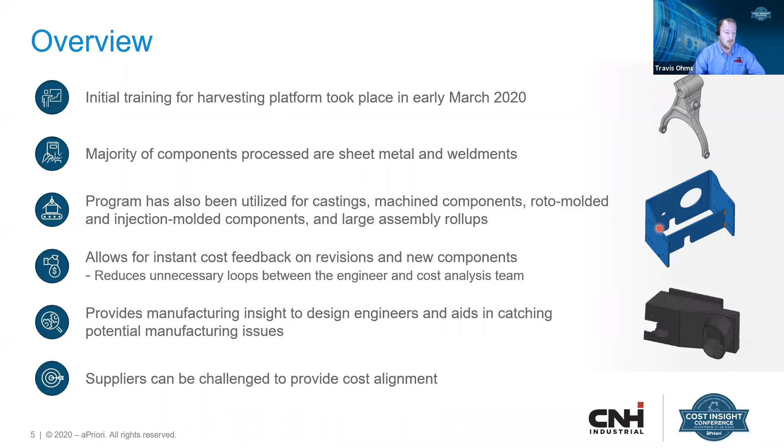So moving on, we'll go ahead and step into our Roto-Molded process evaluation study, which we just recently completed. This was done as part of a current product improvement project. It was initiated through our mid-range combine current product improvement team in Sorocaba, Brazil. It's comparable to a current production roto-molded component for our flagship combine team.

As you can see on the right-hand side, we have a highly featured baseline component to use as a reference. The goal was to ensure that the cost of our new design for the mid-range combine platform was comparable to that of the flagship platform.

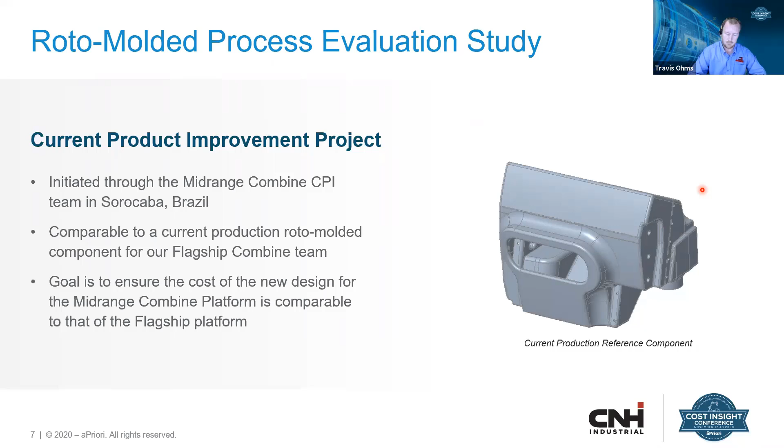So we'll go ahead and take a look at our baseline evaluation. The production component was evaluated in aPriori to understand the cost differentiation between the software and the real world. Having that baseline is an excellent resource to ensure we are remaining grounded and have not made any bad assumptions along the way. So as you can see here, we were able to generate an estimated cost using aPriori of $26.63 versus the actual cost of $25.26. So from there, we had a reasonable margin of error, and we're able to move on with confidence.

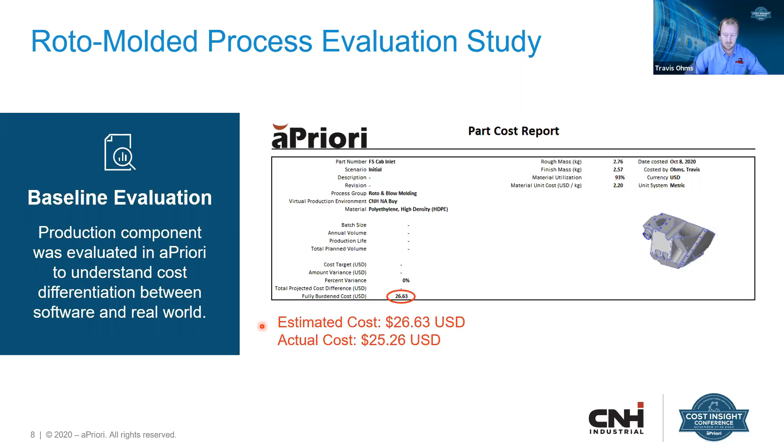Moving on, we were able to generate a new design with that baseline in mind. As the design progressed, multiple iterations were provided from the designer in Brazil to understand the impact of adding the individual features to the design. The goal was to provide instant feedback to that designer on his changes and to understand right out of the gate if this was even a feasible approach he was taking. Processing these iterations also served as an alternate check, as we said in our overview, for manufacturability of the component. Most importantly with this roto-molded design was the capability to mold it, capability to release it from the mold, and so on.

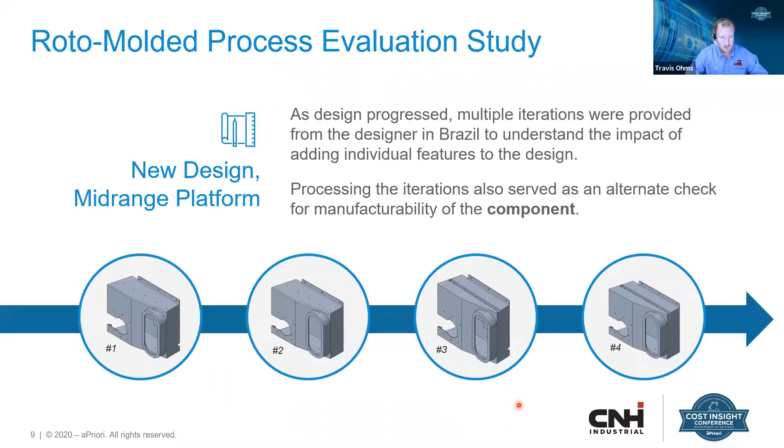So we call it iterations, but we were actually given 4 designs all concurrently due to the designer's location in Brazil relative to mine in Mount Joy. So we started with a simplified iteration, as you see in number 2. Number 1 and number 3 had additional pockets added at the rear of it. And number 3 and number 4 had an additional pocket on the side of it. So we were able to take those iterations and quickly process them for that engineer.

So let's go ahead and step through the breakdown of these proposals. With all things being equal, including annual volume, expected years, and amortized schedule, as you would expect, proposal 2 is the most favorable based off the amount of features. But the knowledge we really gained by doing this is that the additional features were not driving a large cost impact; the delta you can see between the 3 was all less than $1, given those differences.

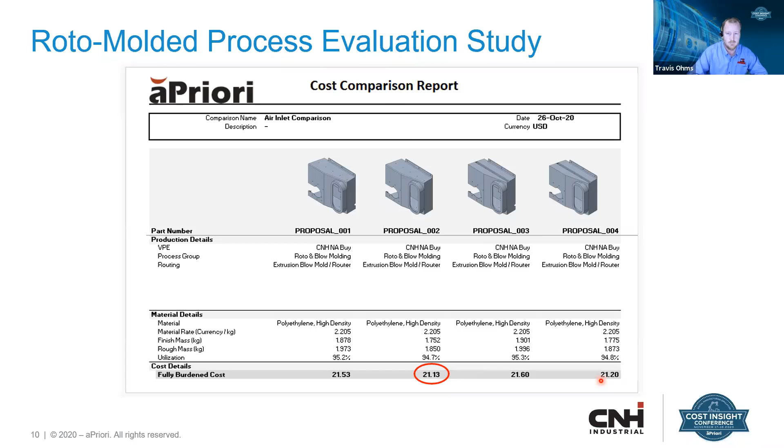So using the costing information generated from the initial iterations, the engineer was able to confidently make updates to the model that could include additional features to accommodate mating components without driving large cost increases. As you can see on the right-hand side, the engineer was able to come up with a streamlined design, capturing additional mounting features, which will ultimately lead to a reduced amount of components at the next assembly level, for a cost of $22.30 US. Using aPriori on highly featured parts is very helpful in proactive part cost management and educating engineers about cost drivers within their designs.

So as you can see in our breakout here on this particular component, we had 198 individual cost drivers within this component. An engineer can evaluate where the cost is buried and make changes as required. Not only that, more importantly, they're gaining future knowledge. As they are designing, they will understand what needs to be done proactively on those future components to avoid that cost.

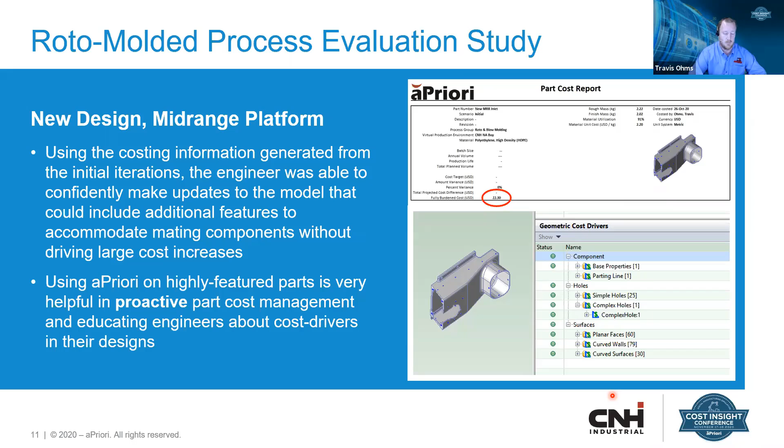So we'll go ahead and do a final cost summary based off of that quick evaluation. As we see down here, we had our reference production part estimation. That was the component that we currently produce for our flagship combine. Our estimation showed $26.63. That was based off a current cost comparison of $25.26. As we said, we were within margin of error. From there, we stepped into our initial simplified proposal, which produced a cost of $21.13.

And from there, we were able to move on to our streamlined production intent design, which included additional features for only $22.30. So in summary, using aPriori along with the known baseline component allowed for a confident cost evaluation of the new design. The engineer was able to incorporate the added features he wanted while maintaining his cost targets. Another important point, aligning these cost targets during the initial design phase rather than after the design is completed or possibly tested greatly reduces the risk of circling back to redesign.

Being part of a harvesting team, the window for testing can often be narrow. When farmers are ready to harvest, the design needs to be in place. Engineers must provide designs with their best foot forward to ensure it's correct the first pass, because you may not get a second chance. Typically, the mindset has always been functional. Now we can proactively be conscious of that financial impact as well.

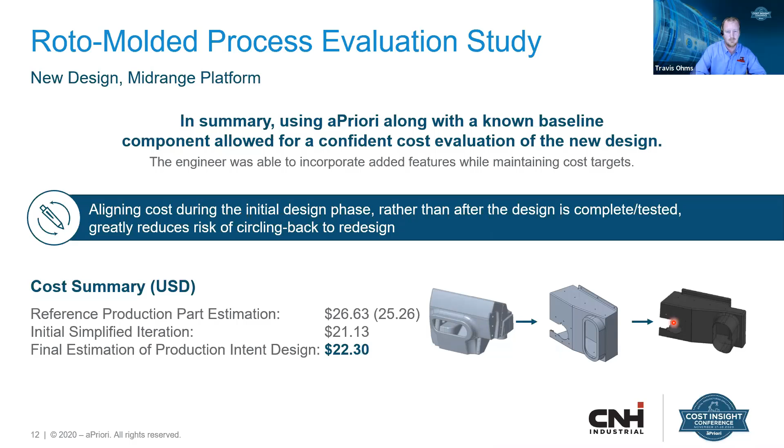So the evaluation was done on 104 unique part numbers. 38 of those were level 1 assemblies and components. That includes a mix of weld assemblies, molded components, hardware, and various sheet metal processes. Completing the deep dive analysis allows for a relative cost comparison to our quoted cost. With this, we were able to generate an 8% differential. We were short 8% versus the quoted cost.

But from there, we're able to make evaluations on our end, particularly which components have room for improvement. Can the design be improved on our side to reduce that cost? But also, is that quoted price disproportionate to the expectation? Back to our overview, can we go out there and challenge those suppliers on those given costs?

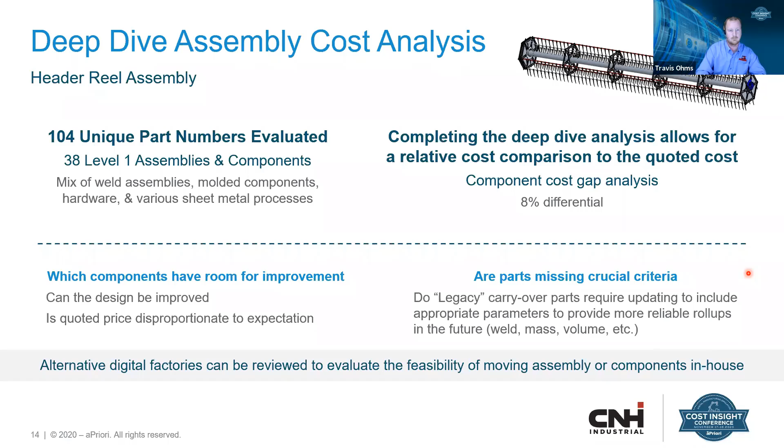So on this deep dive assembly cost analysis, there are some next steps the team wanted to get into. Of course, it's closing those final gaps in estimation. We need to go through, review those legacy components one by one, and update as necessary. Again, checking those weld assemblies, making sure we have parameters that are driving correctly, verifying hardware, ensuring that we're pulling the correct piece of hardware we like, not a family table, for example. And then understanding that true volume for components used across multiple assemblies.

And a great example of that is our fingers on the reel tines. Just in this assembly alone, we have 119 reel tines. So that's one assembly on one width variation on one header platform. So obviously there's going to be several of these used across the world. So we need to understand what that true volume actually is.

And moving on from there, benchmarking versus our internal digital factories. Should this be a supplied component or assembly, or is it feasible to manufacture in-house? Which internal manufacturing location provides the greatest opportunity for cost reduction? Just as an example, given the delta between our Digital Factory 1 and our Digital Factory 2, we saw an estimated difference of $1,207 per assembly. Annualized product cost avoidance could be in excess of $2.1 million. So there's great opportunities for improvement based off those numbers.

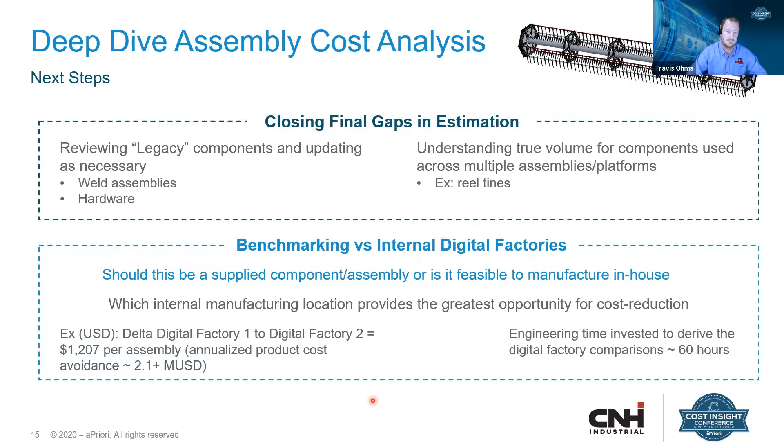So just a quick wrap up and some next steps that we're looking forward to in our mid-range and global product lines. For the mid-range combine platform, currently we've been using this to supplement our current product improvement projects. As we shift to the future, we do look to incorporate this as a standard for our product development applications where feasible. That means encouraging all designers to utilize the program during part development. It allows for quick BOM cost roll-ups to evaluate the feasibility of a design, project, or program. And from there, our business case can be made with confidence and in a much more timely manner than it is today.

So appropriate manufacturing locations are also a piece of that. They can be selected utilizing the digital factories within the aPriori software. And expanding it out from there, driving our continuous improvement toward the world-class engineering vision. We want production intent, right first time designs. That means we want the features done correctly the first time. We want the cost done correctly the first time, the weight done correctly the first time. All these aspects need to be put together so we have a product that we are proud of the first pass.

And part of that is the knowledge management, continuing the journey of cost driver knowledge and competency growth among our people. Engineers need to have an intimate knowledge of the parts they are designing, and we want the knowledge to be ingrained within them so they're contributing to benefit the scope of the overall program and overall team on a daily basis.

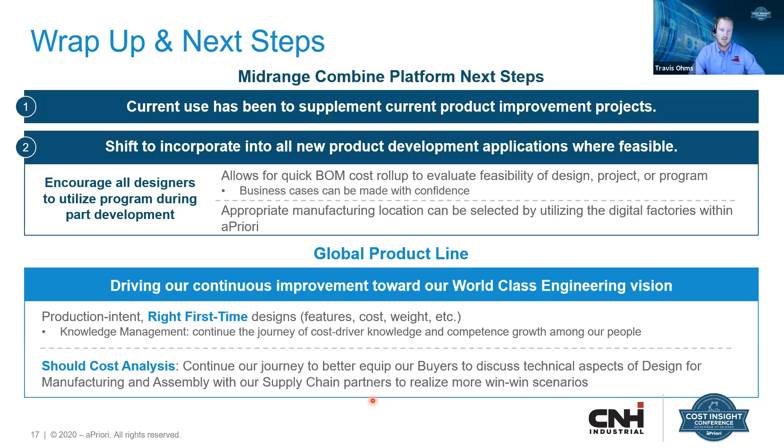The first question that I saw is, what percentage of the engineers are using aPriori, and then what challenges have you seen when using the tool? I guess you can speak about the team that you work with and understanding some of those challenges and what percent you're seeing today. Yeah, so as I said, we rolled out the software heading into the pandemic, right as the shutdown started to occur. At this point, I'd say roughly 50% of our office is using it. Challenges so far, just like any other engineering program, picking up. Once you get rolling, it's very intuitive, but just knowing where to start was the initial challenge.

Okay, great. The second question, have you had any successes using the virtual factory function to outsource and insource parts? Yes, we've actually been utilizing this for footprint evaluation, understanding where particular components should be made. And that means maybe it's being shifted from one facility within CNH to another facility where we have a great opportunity. On that last slide I shared, just that one assembly there, you saw there was a delta of $1,207 between the two. So there's great potential there. But yes, opportunities to outsource, opportunities to insource, there's a great deal we can learn from it and a lot more left to learn.